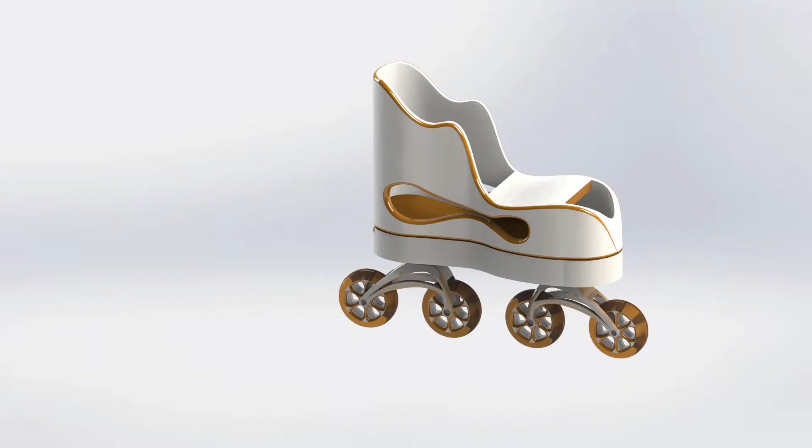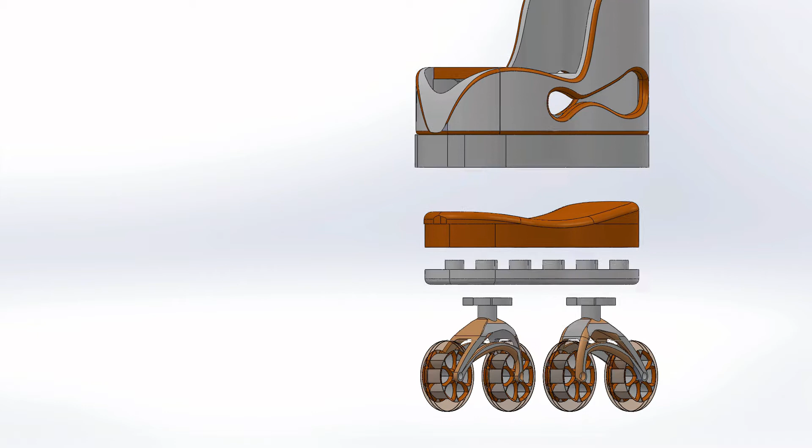These are the Cheapskates. They are quite a new different design compared to conventional skates, but what makes them different aren't the aesthetics, but rather the components. And that's because Cheapskates are a modular design. Here you have an explosion of the skate showing each component. That is the shell, the rubber sole, the undersole, and the wheels. They all slot into each other, making it easy to take apart and put together.

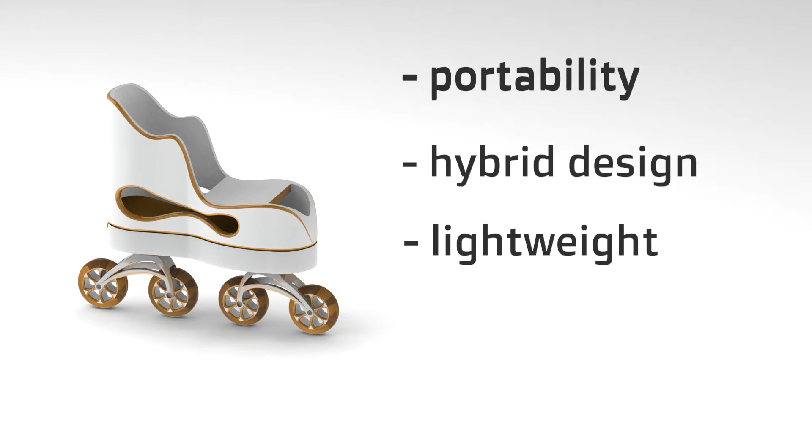Cheapskates has 3 unique selling points. It is portable, it is a hybrid design, and it is lightweight. I will go more in depth with each of these 3 points. I designed the Cheapskate to be portable because of the issue outlined earlier, that transporting skates around can be very cumbersome. I did this through ensuring that each part of the skate can be removed, especially the wheels. With this design, the wheels can easily be taken off and put in a bag or a pocket for transportation.

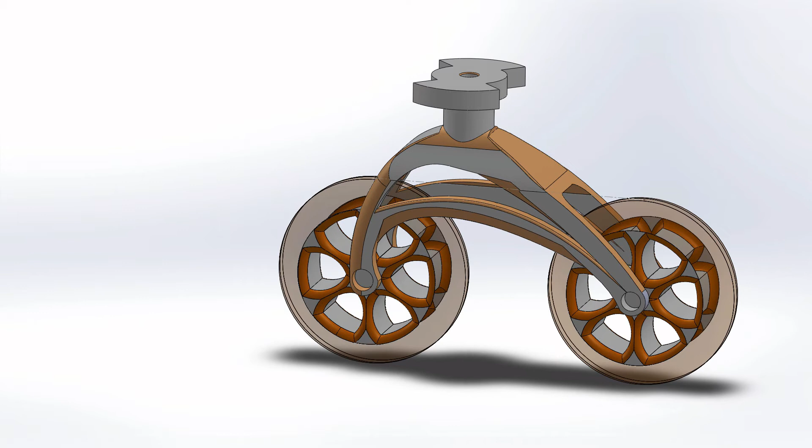In order to facilitate taking the wheels off, I came up with a bayonet mechanism that quickly allows you to put in and take off the wheels. The top of the wheels goes into the female part that is shown here. Twisting the top of the wheel slots it into the mechanism, holding it in place. Taking it off is as easy as twisting the wheel and removing it. As you can see, the wheels come off the bottom, leaving the sole flat and easy to walk on.

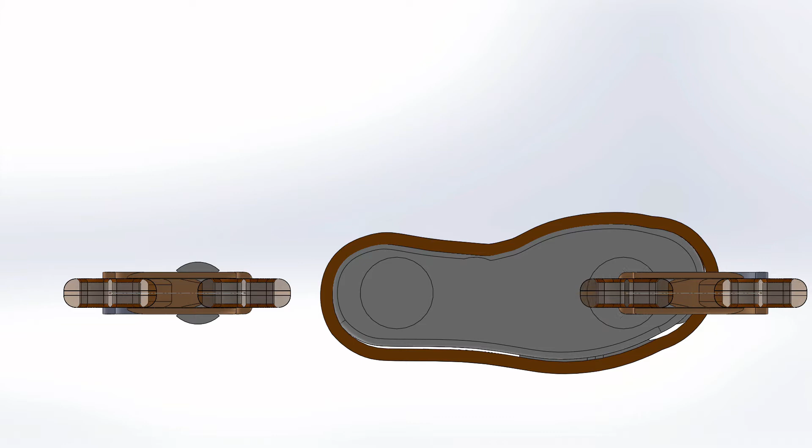This leads us to the second USP of the Cheapskates, hybrid design. I focused on inventing a way in which the skate could perform as both a roller skate and as a shoe. This required 2 things: that the skate could be rigid enough to skate safely on, and that it had flex when it needed to work as a shoe. The 2-sole system shown here is a solution to this problem.

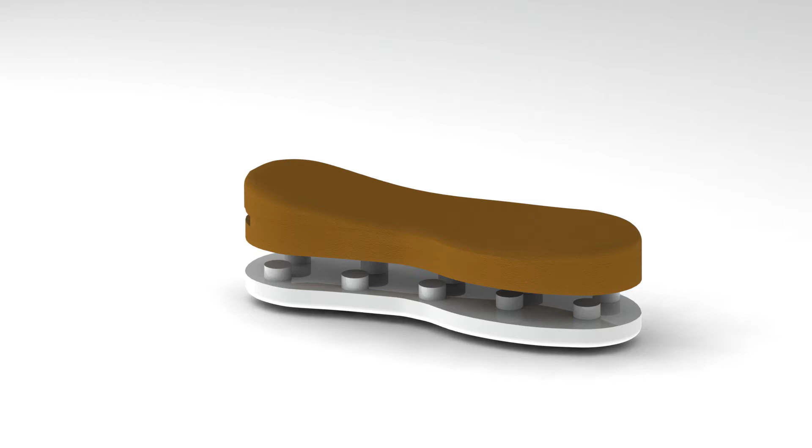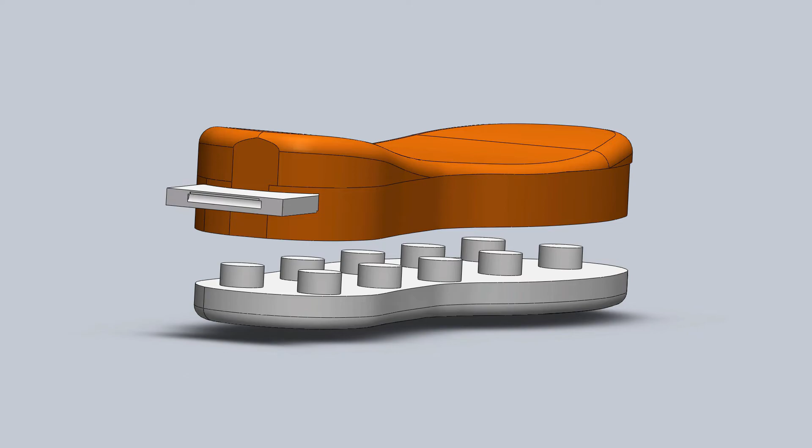The orange sole is made out of rubber, and so is flexible. This is paired with the undersole, made out of hard PU. It is much thinner than the orange sole, providing a solid surface to walk on but not impeding the flex of the sole. In order to ensure the skate is rigid enough to skate on, there is a slot in the middle of the rubber sole where a long plank of hard plastic is inserted, thus transforming the rubber sole into a solid sole to skate on.

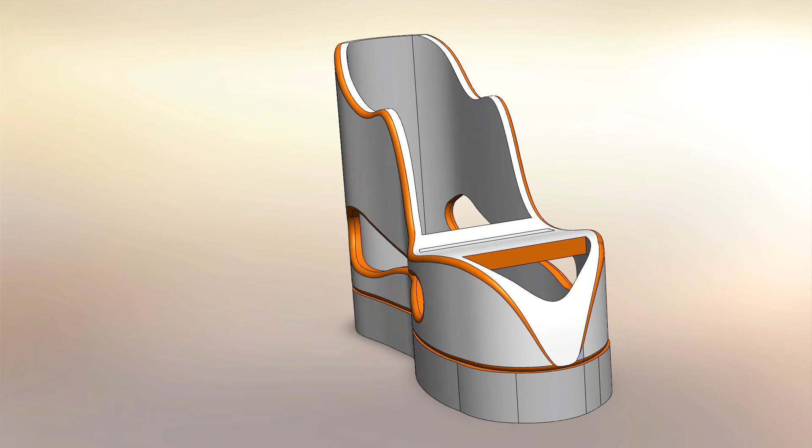The final USP is that the skate is lightweight. Because the boot is made to skate and work as a shoe, it is made out of quite thin polyurethane, which reduces the weight significantly. The cutouts are a nice aesthetic, but they also reduce the weight of the skate. The heaviest component in a skate are usually the wheels because of their metal chassis. It is also possible to make this chassis out of plastic, which is what I opted to do here. Also, because the wheels are removable, without them the skate becomes much lighter.

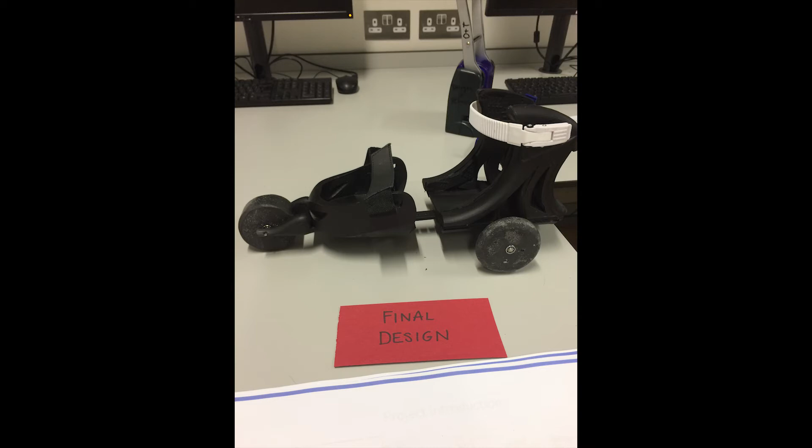The aesthetics of the skate were developed with 3 things in mind. I took inspiration from the Cheapskates version 1, shown here, the conventional inline skate, and most significantly, the function of the skate. The hybrid aspect of the skate, being a roller skate and also a shoe, is what really informed my aesthetic decisions in this process.

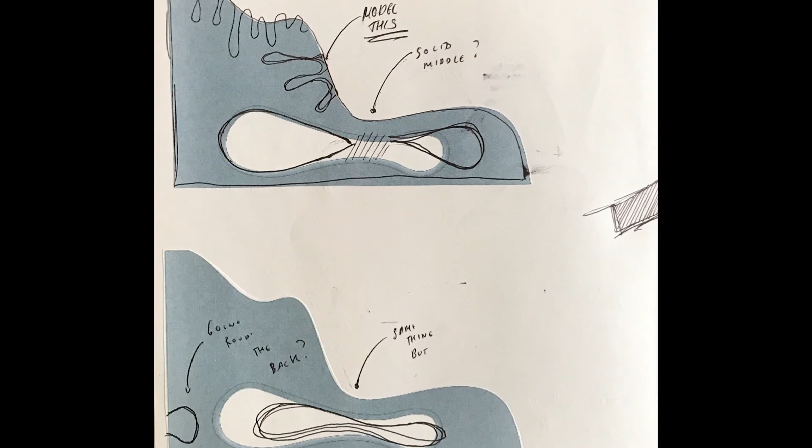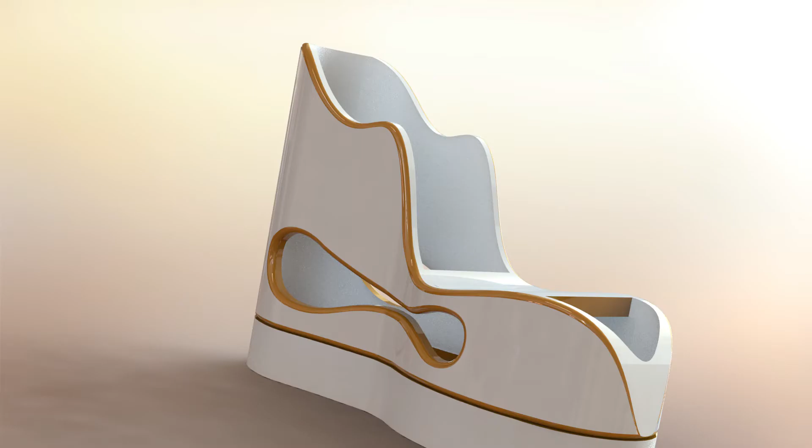I went through a number of iterations with the shell and the wheels in particular, shown here. Eventually, I settled on the Cheapskates design shown here. The smoother, sleeker design than most inline skates means that it's not visually boxed into the category of being a conventional roller skate. I also experimented with some different colours, including black and red and white and blue, but ultimately I went for white and orange, which is non-gendered, clean and simple.